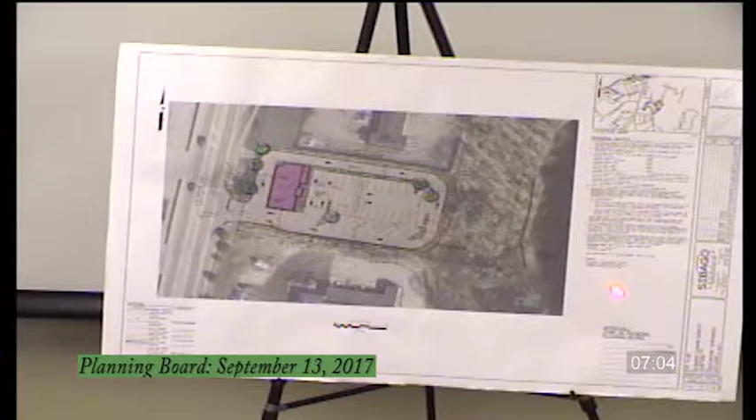The parcel is 0.75 acres in size, so it's a fairly small parcel. We're only developing about half an acre of the parcel. As you've looked through the plans, there's a fairly steep slope off the back that goes down to this kettle hole in the back side of the property, and that slope is one we really want to stay away from for development purposes. So we've worked to keep the development up towards the front of the site.

Dunkin' Donuts currently leases property in the Circle K that's just about 200 yards southerly of this site, and they've been trying to find a location in Raymond that they can own and operate on their own. They have found this parcel of land and have actually closed on it and purchased it. Is that correct, Jim? Yes.

As I indicated at the last meeting, one reason we went through such a thorough presentation was that there was a very short due diligence period, and the owner had to decide whether to purchase the property or search for another site. We felt this seemed to be an appropriate location, and we appreciate all the input the board had for us.

The Dunkin' Donuts site will include about a 2,000 square foot building at the front, parking area internal to the site, and circulation for quite a bit of queuing around the perimeter. This has worked pretty well on the other sites they've done.

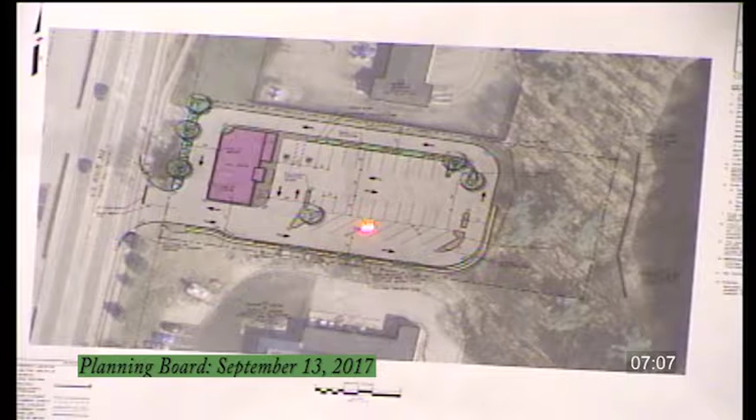The order window or order kiosk is over here, with pickup around this side and exit out through this way. The entrance comes in and separates the parking from the circulation area around. There are some diagonal spaces within the circulation path around the site. Where somebody needs to exit through here, we've provided a break in the curbing so they can get around the site. We envision these will mostly be employee parking, with this being customer parking inside. We've also provided handicap parking within the project site.

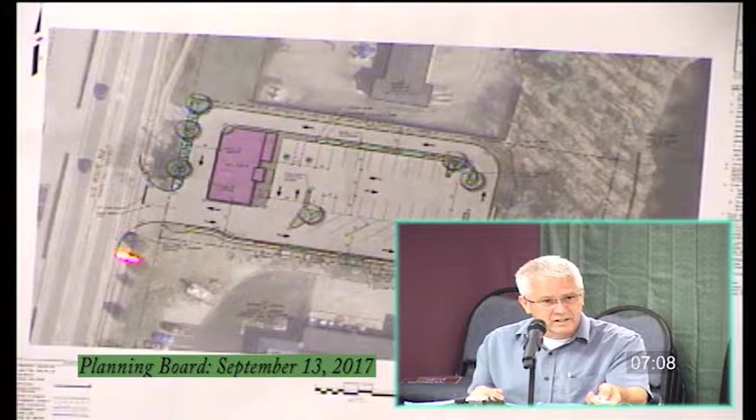For truck circulation, as I mentioned at the last meeting, in your packets there are turning template diagrams showing how trucks would come in and out of the site. We've designed the site to allow trucks to use the parking lot to circulate around—these are rollover curbs in this location and down here. Delivery times can be scheduled by Dunkin' Donuts or the owner to be outside normal business hours, so trucks can come in when there are relatively few people or nobody in the lot, and make that movement around inside the site.

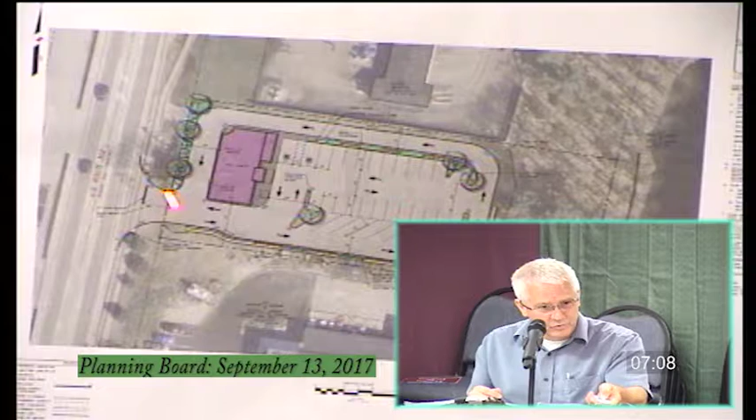There isn't enough room for the truck to make this turning movement all the way around—a tractor trailer just needs more room than we can provide. This design is meant for passenger vehicles moving in and around the site.

The topography on the site slopes towards the back of the parcel, towards the kettle hole or pond in the back. There's a single-family house on the property that will be demolished—I think it sits just about in this area—and we'll develop within this footprint.

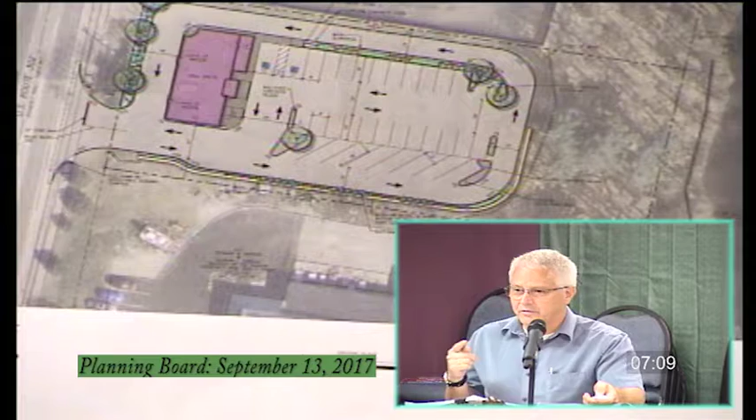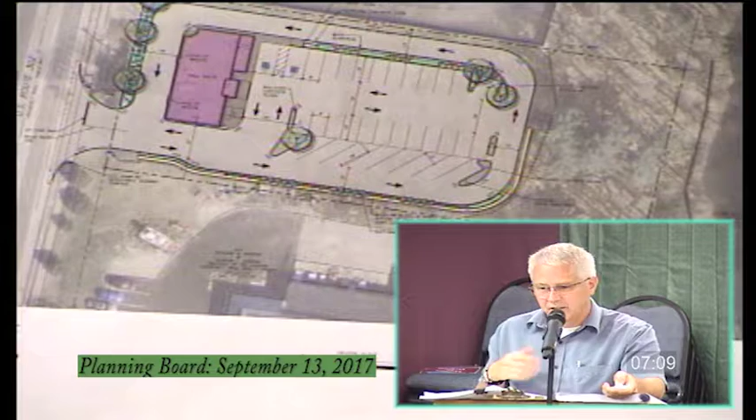The project will include a subsurface wastewater disposal system since there's no sewer in Raymond. That system, detailed in your packet as the HHE 200, is an advanced treatment soil air system. Because of our experience with Dunkin' Donuts, we like to use a higher level of wastewater treatment, since high BODs come out due to the cream and materials that go into the drinks. So we have an advanced treatment system here with a 1,500 gallon per day oil and grease separator out of the site septic tank location.

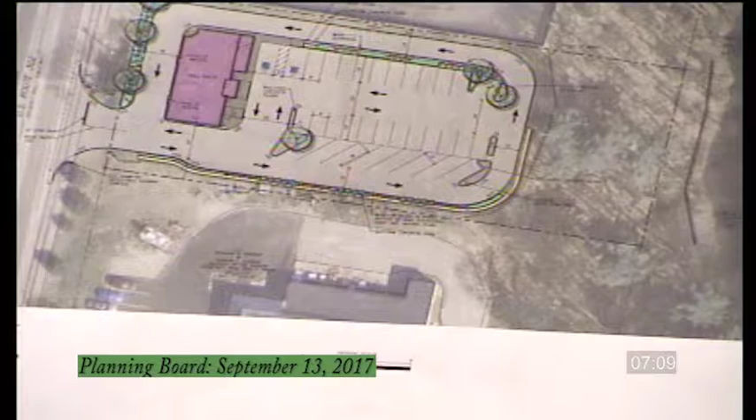Because of the size of the site and the volume, we've applied to the State of Maine for what's called a lot size variance waiver, since you're allowed only a certain amount of flow for a certain lot size unless you request a waiver. We've gone through this process several other times on commercial lots, and as long as we're not asking for any other waivers, it tends to go through pretty straightforward—Will noted that in his review comments.

The other thing is we have an underground stormwater management system on the site. That system will take surface water and run it through an underground chambered system, through a filtration system, and then discharge it to the back of the site.

While we don't have to go to the Department of Environmental Protection for stormwater management on this site, we have designed a system to treat the stormwater generally to those standards. The site's too small. Our development area doesn't trip any of those thresholds that would require us to go to the DEP. Will's review had commented on the discharge rates from the system.

We were focused on treating the stormwater, and since this property abuts this sort of kettle hole in the back of the site, there's really no outlet. It looks to be a glacial feature. We were going to focus more on treating the stormwater to get it back into the pond to allow for recharge of that treated water back into the system.

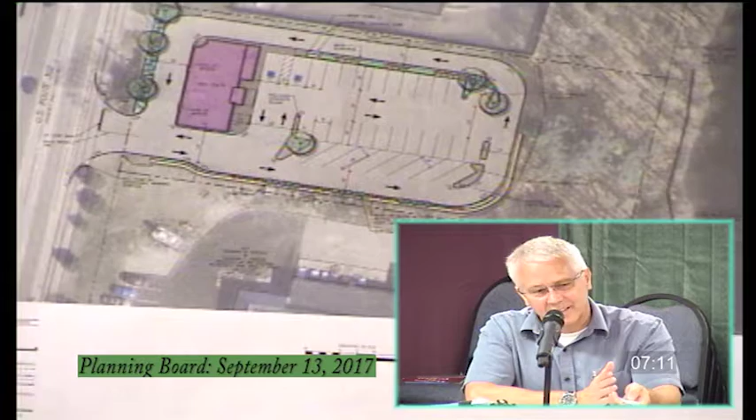We have since looked at our model after talking with Will — and I'm sorry, Will, I caught you out in the parking lot before the meeting — but we have a way to technically increase the stone volume and change the design slightly so that we get a little more detention on site, and so that our pre and post development discharge rates are pretty close to each other. Still, we treat the water to the higher level of standard and discharge it to the back of the site. Will has mentioned that in his memo as one of the conditions, which we will certainly address — I'll provide the paperwork for it. But we did look at that, and I appreciate that conversation we had.

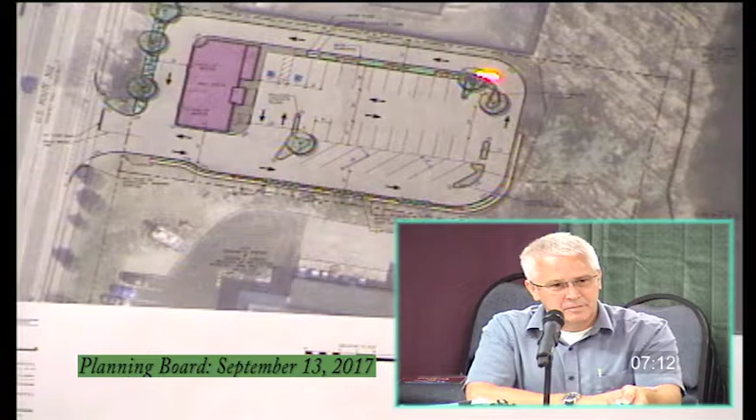In your packets, there's a photometric plan for lighting on the site. We use Swaney lighting, which uses LED cutoff lights focused on the parking area. The photometrics were provided in your packet to show that we'll keep our lighting to our property and won't be dealing with sky glow. Basically, dark sky lighting is the intent here.

I want to take a moment to talk about the building. Well, let me talk about traffic a little bit more too. All Dunkin' Donuts projects require a traffic movement permit, and we have filed for that traffic movement permit.

We had our scoping meeting with the town. Of course, Chris Hansen was there, and Will, I don't think you were able to make that meeting, but we provided a copy of the traffic movement permit in the packet. We have since met with the Department of Transportation and done some traffic counts on the site. At this point, it looks like they should be issuing a permit in the very near future.

One of the things they look at on Dunkin' Donuts sites is that traffic approaches a little over 200 trip ends in the peak hour. A trip end is a car coming in, a car coming out, so it might be like 100 round trips in and out.

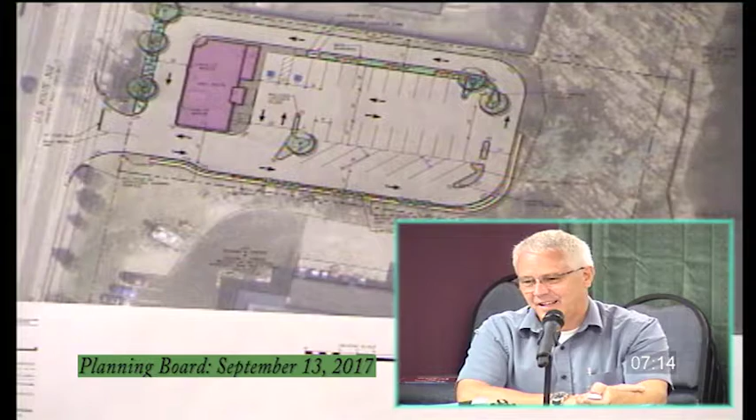They also look at the ability to make a left-hand turn movement from the adjacent road. If you've ever been up at the Naples Dunkin' Donuts site, you'll see a left-hand turn lane was built there coming from Naples heading into town. That was because the warrants were there — meaning the traffic counts, the stacking, the queuing to make that turn justified the left-hand turn lane. In the Naples case, we had to construct the left-hand turn lane because there wasn't anything there at the time.

In this section of Raymond, there's actually a center dedicated turn lane that allows for turning in either direction, so in this case we already have that turn lane built into the site. Sight distance is great at this location — it's a pretty flat, linear portion of the site, so that's not a concern.

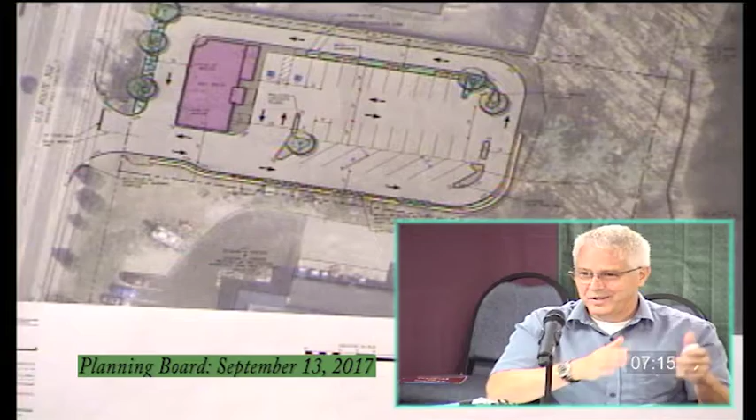Nathan White, Public Works Director, has asked us about curbing — originally we didn't show curbing, but we've since added curbing to the plan coming out to the street. The sidewalk system that's out on the street doesn't have curbing associated with it; you have road, esplanade, and sidewalk on it.

Apparently, at some point — and I don't know whether it's the town or DOT, maybe Will knows — Nathan mentioned that curbing was going to be installed by the town or DOT through here. So he asked that we show the curbing running all the way out so that it would match into the curbing they will be installing, and we've done that on the plan. It'll be important to coordinate the timing of when our curbing goes down and when Nathan does his, because I don't like to put curbing out into the travel lane when there's not another curb to match to.

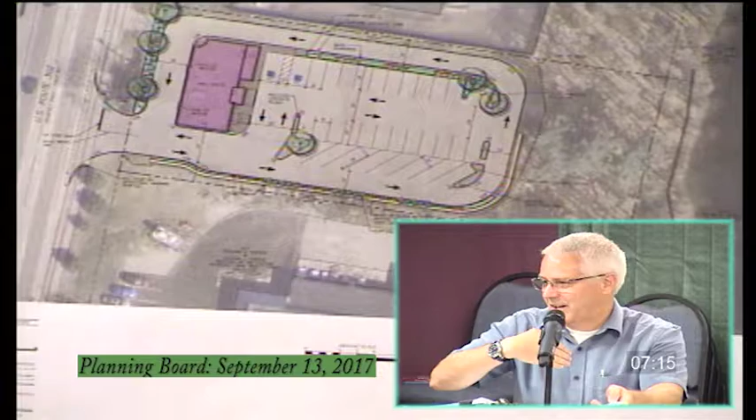Otherwise, it's just a hazard for the plow to clip and rip right up. So we'll have to make sure the timing is coordinated, and we'll work with Nathan around that piece of it.

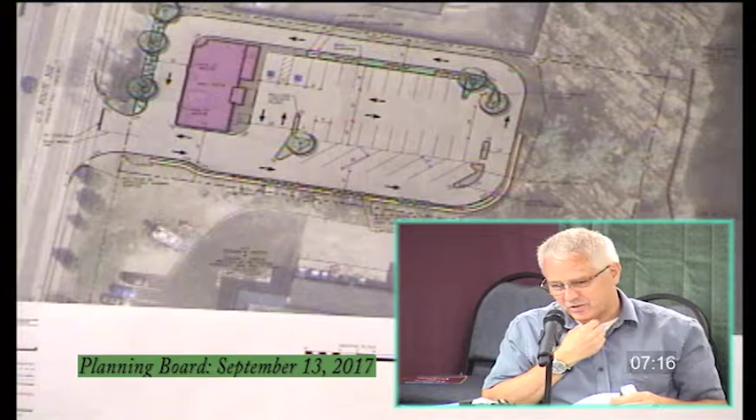The building itself is fairly small, about 2,000 square feet, not much larger than a good-sized ranch home. We've designed the site and the building, and I'm going to turn the plan around.

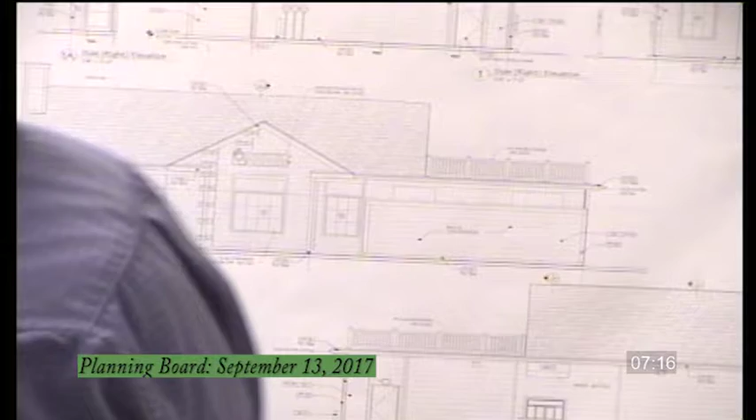So those are the building elevations of what the building will look like, very similar to what we did in Naples. Raymond has architectural guidelines, which actually were helpful to us.

Dunkin' Donuts doesn't like to build buildings like this at the corporate level. They prefer something more like what you see in Windham. But because the town had architectural design standards, we were able to provide that to Dunkin' Donuts, and they agreed, at least that's my understanding, Jim, at this point. It's tough for them to do that, but they agreed because we sent them your entire packet of architectural standards. So the town did a good job putting that together, because we'd much rather build a building like this.

This building will have an asphalt shingled roof with architectural shingles. It will be a pitched roof with dormers, one on the front and one on the side. There'll be a monolith bump-out on the front of the building resembling a chimney. We'll do eave returns and changes in the roof lines so it looks different from various angles, giving it more of a contemporary New England look.

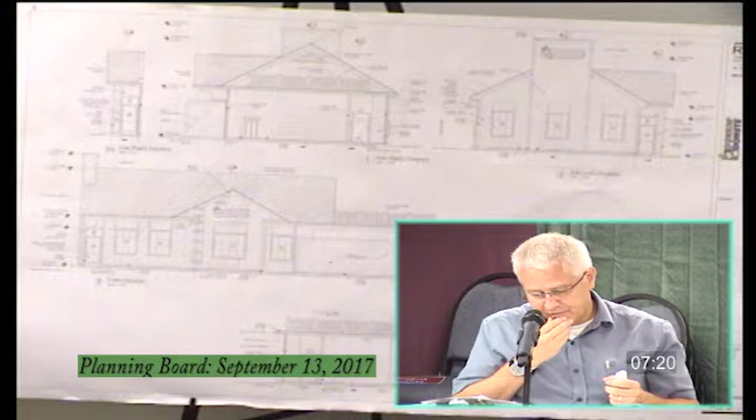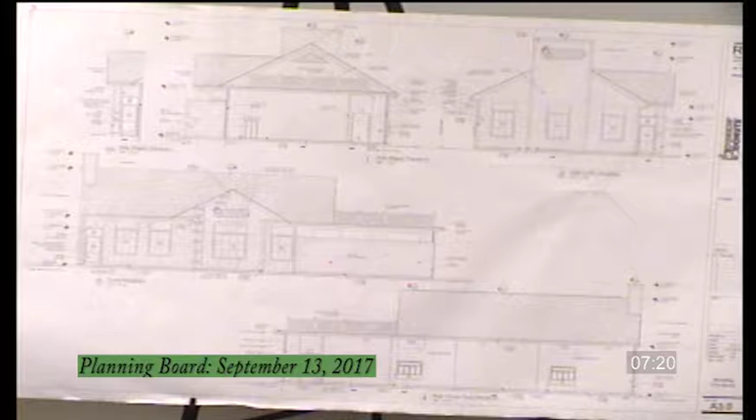At our last meeting, we discussed the need for a waiver on the side yard setback. If you recall, the commercial zone has a 15-foot side yard setback, which can be waived down to 5 feet in a setting where the development on the other side — like pavement or parking close to the property line — already exists. We have that in this case with the car wash to the north, which has circulation right up next to the property line. They're almost paved right up to the property line.

What we're going to do is let me flip the back over.

Up on this side, here's the edge of the parking on the car wash side, and here's the edge of our parking. There's a 5-foot separation through here. On the southerly side will be 10 feet off the property line. Because of the topography drop off to the south and to the back, we'll end up with a modular retaining wall around this piece of the site. That wall will be set back about 7 or 8 feet from the property line, with the pavement 10 feet from the edge of the property line.

The reason we're asking for those waivers, as we talked about at the last meeting, is that when you look at the size and configuration of this parcel, and what we need to accommodate for separation between the drive-through and the parking on site, you start at this side with the drive aisle. We do provide some landscaping here. We have a circulation area, parking, angled parking to try to reduce this side, and a drive-through on this side. When you take the physical measurements across, you end up with 5 feet on this side and 10 feet on this side of the site.

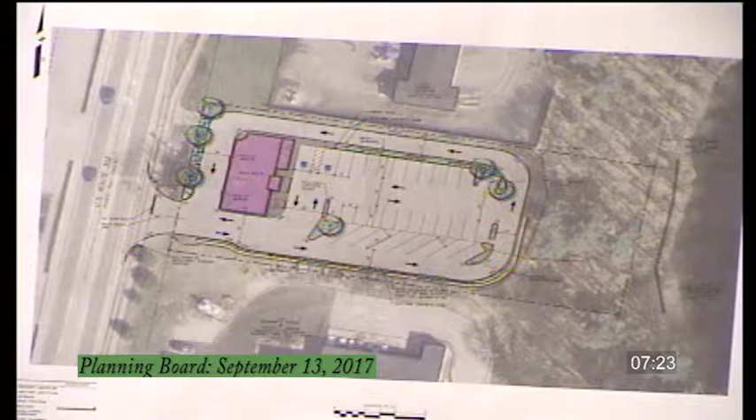We looked at other configurations through the process. We talked about that quite a bit at the last meeting, bringing the drive aisle through the center of the site. But what happens is when you've been to the Windham Dunkin' Donuts in Standish, when the drive aisle goes through the site, people are stacked right up through the center of the parking, and nobody can get into the parking or out of it. So it's best to have those separated. It's a lesson learned from a number of Dunkin' Donuts, and this works best for circulation. It's very similar to the one we did in Naples, and that circulation from all accounts works very well.

We do have a landscape plan developed for the project. It includes landscaping and street trees along the front, a couple of trees on the back side, some landscaping and a small esplanade along the wall on this side, and additional landscaping in this green strip area and what we can fit in along the edge. The owner is very aggressive on his landscaping—he likes a lot of perennials, likes a lot of look to it. Jim can nod and take him on that. More than likely, there'll even be more landscaping than what's shown on this plan. If you've been up to the Naples location, there's a fair amount of landscaping involved, but he's very adamant about that for his landscaping piece.

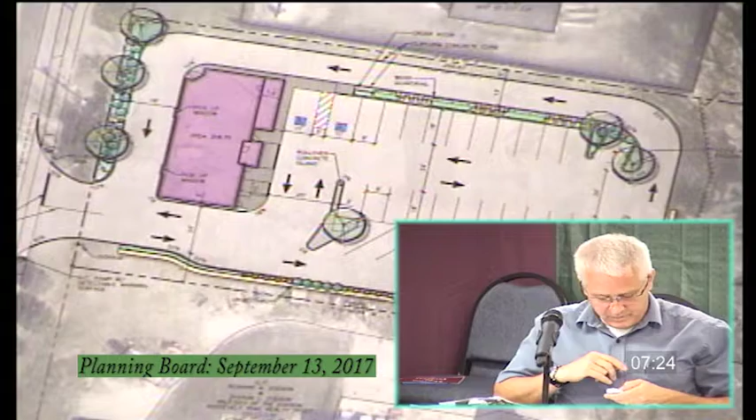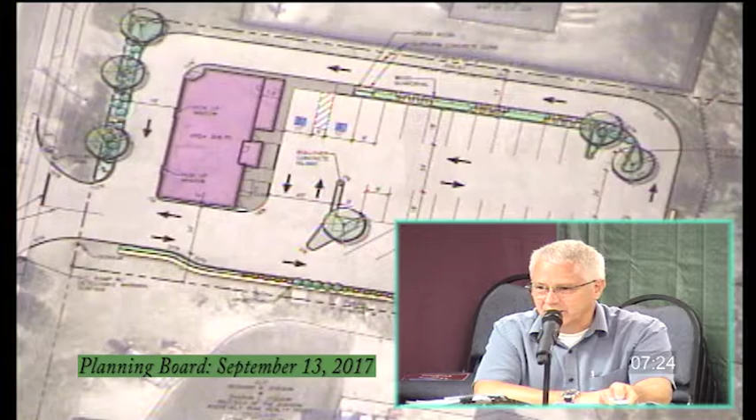There was one other item that somebody on the board brought up last time that was a great idea—a question about if we have all this pedestrian movement along Route 302 and the sidewalk, shouldn't we have some way of getting a sidewalk up to the site? This was my color rendering from the earlier plan, but the plans you have that we're asking for approval through now do have a sidewalk that comes up alongside the building to get to the site. I believe, Will, that was you who mentioned that, right? Okay, so it was a great idea, and the owner was all for it because they want to capture pedestrians too coming to the site. So the plans in front of you have that access to the site.

So with that, we're here tonight. Appreciate you hearing our presentation, and either Jim or I will try to answer questions the board may have. And if we read the planner's review, we are agreeable to the 3 items that were in the review letter. In fact, Will and I talked about them, and so we look forward to having a new Dunkin' Donuts in the community. Thank you.

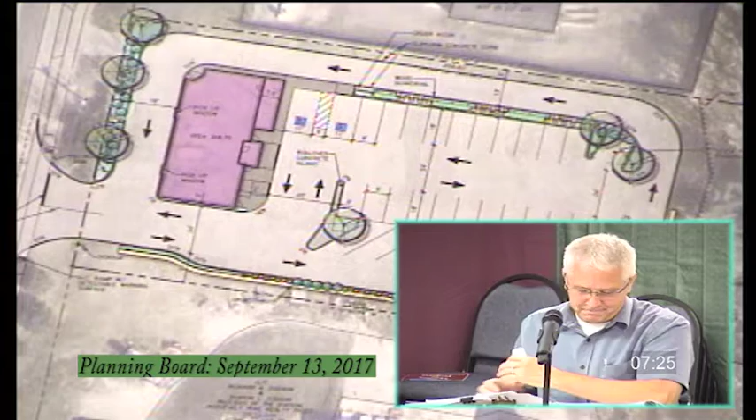We have Will's review first, or should we do that before the public hearing? A little bit. Is that what we normally do? Yeah, okay, all right. Will, you want to go over your comments on the application for the public hearing?

Sure, do I need to push this button, or am I good? I'm good, excellent. Thank you. My name's Will Haskell with Gorrill Palmer Consulting Engineers. I apologize because we received the application material about a week ago, so it took a little while for me to get through it and get the memo back to you folks here at the board.

I also have to apologize in that I didn't have a copy of the design standards for the building, and I wasn't able to download those off the website because the link was broken. So I did not review the design standards relative to the building architecture in this memo. I'm not sure what that may cause, but I wasn't able to get that as part of the planning board memo. But in general, I think the plan is very well done.

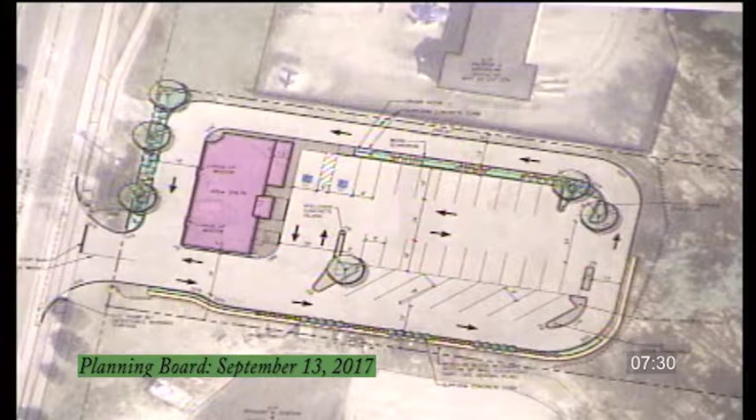The one comment I had was about a certain registration form that DEP likes to see for infiltration systems. That goes away because they're not going to have an infiltration system. And then the other comment I had was relative to separation between septic systems and stormwater infiltration, but if they're going to have a liner in there, there is no issue there.

So again, I haven't seen the revised calculations, but based on what I hear, it sounds like they'll address my concerns relative to the stormwater on this project.

And for utilities, again, they've provided an ability to serve letter from Portland Water District. Owens described their advanced treatment system for the septic disposal. They have the 1,500 gallon grease trap, which is a good thing for a restaurant type facility.

I guess one other comment—as you were describing the retaining wall, Owens, it wasn't clear to me, and I may just be missing it. Is there any kind of guardrail along that curb line with the retaining wall, or is there not a need for a guardrail there? I know you've got a curb all the way along that edge, but then you've got the retaining wall, which isn't too far away from the curb, and it almost looked like it might need a guardrail in there, because it looked like the retaining wall was ranging anywhere from 4 to 6 feet of elevation difference.

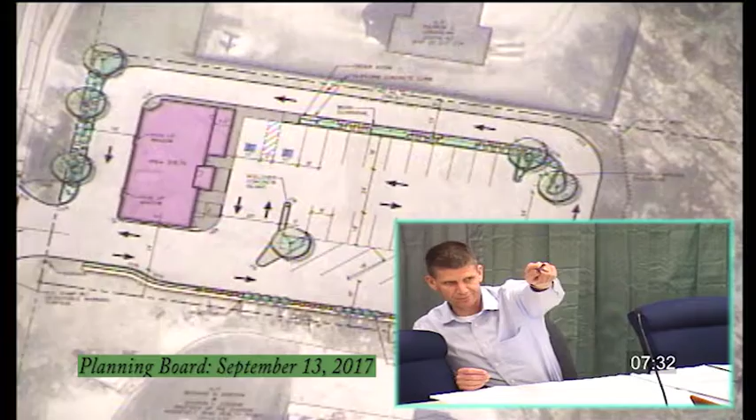You talking around the back lower right corner back there, or? I don't have a pointer, but basically all the way from the entrance around the back corner. Oh, okay.

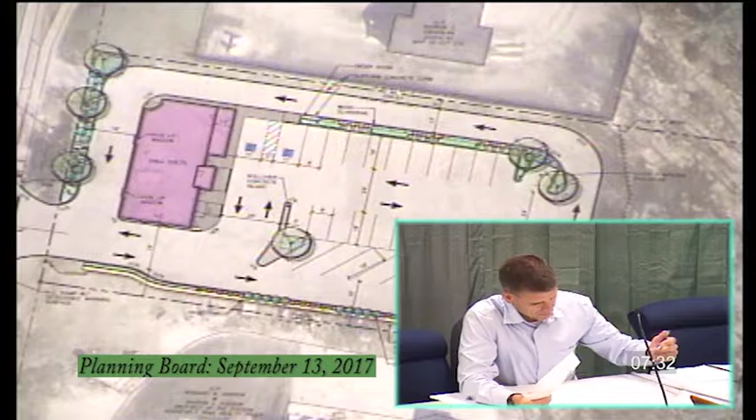I actually had thought about a guardrail through there at one point, because on highway road designs, if you don't have a clear zone, you have to add a guardrail. I was trying to decide if something like this would constitute a road or some sort of standard for that. I was wrestling with that because the vehicles going through there will most likely be stopped.

They're moving, creeping very slow while they're stacked and queued, and I don't have any pedestrian access back there. So I guess I'm not opposed to putting a guardrail up there. I'm a little bit ambivalent to it. I don't mind doing it.

It's just, from my perspective, if I had some documentation from the applicant in terms of why they feel like they don't need a guardrail in that location, maybe a written response or something, I would be fine with that.

I generally agree with you relative to the slow-moving traffic in there. You do have some pitch down in there. I didn't measure what the slope was exactly, but it looks like it's 2 to 3% or so running down that side.

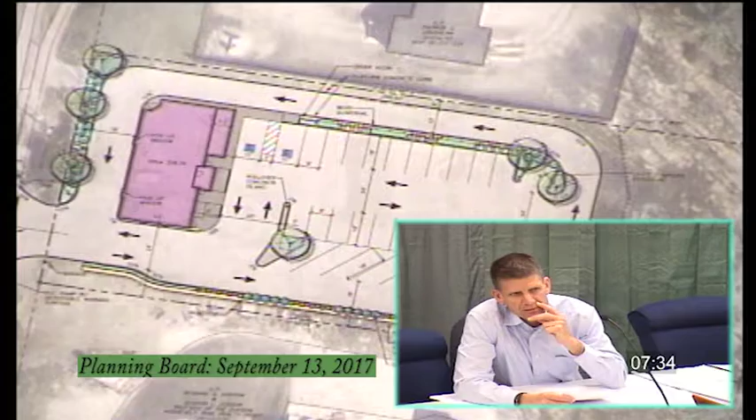It would be sort of thinking in terms of probably where the most risk is, might be down around that corner. So maybe that would be a place to put some guardrail, down around that corner, and then maybe not worry so much about this area here, because there's a storm drain down there and it's all kind of coming down to that corner.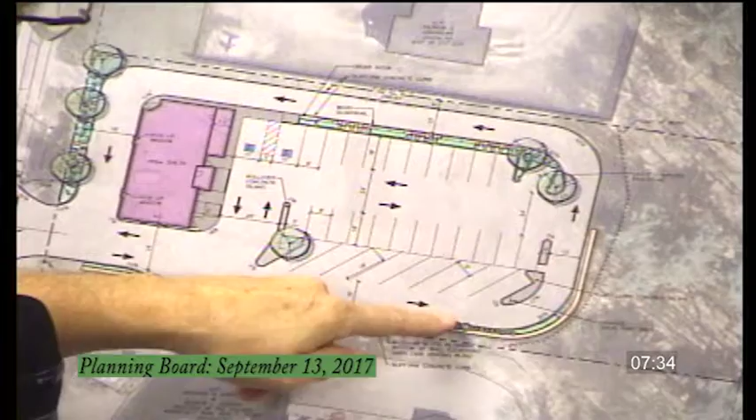I'm not opposed to doing that down in that corner. That might be a good sort of safety approach. Oh, and how much of the retaining wall is exposed face on the high side?

Is it pretty much flush, or is it up 12 inches or 18 inches? These walls, you can build them any way you want. I just don't know how you thought about that design, whether building the wall another course or two high would obviate the need for a guardrail and be a little bit less expensive.

So we have curb on the inside. You know, I don't have that detail with me. I don't know if it shows a reveal, but that is an option. We could maybe do a reveal, and instead, I think if you do a guardrail, it has to be a certain height.

32 inches? I don't know, or 30 — Will, do you remember that number? I mean, the other option might be like a timber type guardrail or something that might look a little better than a galvanized metal rail in there.

Jim just said timber, please. Not that — forest products, good. After everything we've done with trying to make the building look nice, to put those — yeah, no.

What type of a height would you like to see? If they extended the wall up, what would you like to see? Well, the problem with extending the wall up is then it becomes a different type of wall. Because those modular block walls, they do have freestanding versions, but most of them are intended to have soil backing them up, and it's a different, more expensive type of wall if you have a freestanding portion of that.

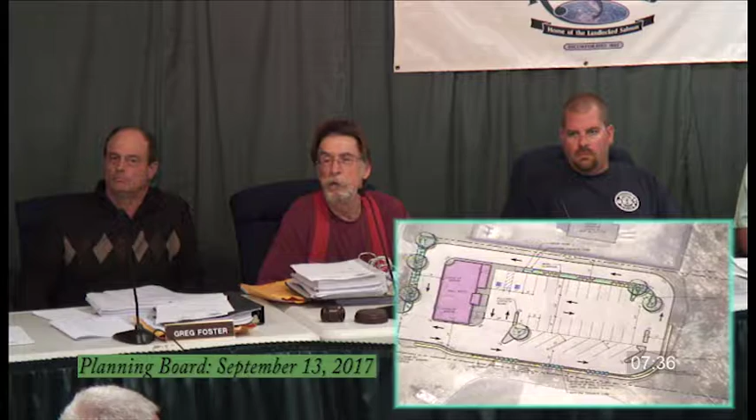So I would almost think the timber guardrail might even be a better option from the developer's cost standpoint than extending that wall up. If folks are agreeable, at this point I would like to propose bringing a timber guardrail around that lower corner, and not trying to do too much with the wall, because I think they have some pretty specific requirements around those modular block walls, how much reveal they can have and things like that.

And what's the retaining on the lower right corner back there, like 4 feet or something?

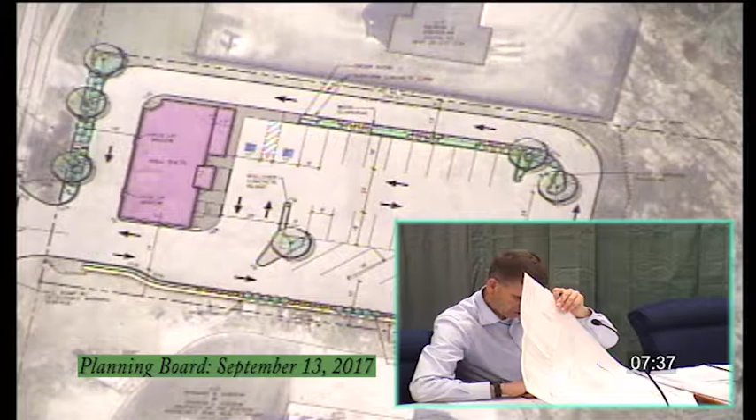On the lowest corner, it's probably more like 6 or 8 feet, Will. Is that what it showed on the plan? 6 feet was actually further up, maybe where it straightens out, maybe it's a lot less down there. Top of wall, bottom of wall, well, it's actually about 7 feet.

From an owner's risk and liability standpoint, I think putting something down around that corner would be a good idea. We'll put something down around that corner.

I haven't done this enough with you folks to know if you want to read down through the memo, or just summarize it like I did. I think anything that's not a conflict or is in conformance with the statutes, we just note it and skip over it. We don't need to read every instance, but things where you have comments, we need to discuss and come to some kind of conclusion.

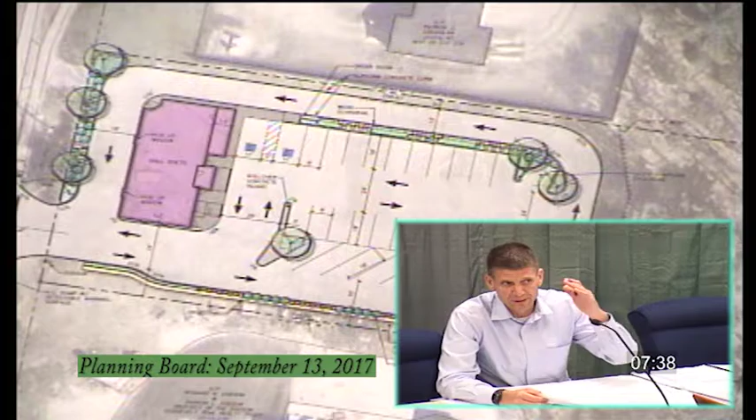I've got the reference to the traffic movement permit under vehicular access, and I talk a little bit about that. So again, I don't have any major issues with the plan other than mostly related to the stormwater that I already talked about.

Going back to the guardrail, what's the maximum retaining on the downslope side that you'd be comfortable with not having a guardrail? Anything higher than a 4-foot or a 3-foot retaining? We need to give some kind of guidance so Owens can know how far he has to take it around the corner there.

Coming down the main access aisle where it's relatively straight, when you've got a 6-inch reveal curb before the guardrail, I'm not overly concerned at that point. But as you start to make that corner at the bottom, I think wrapping the guardrail around there really would make sense from a safety perspective, especially given that the wall is 6 to 7 feet tall in that area.

So to give some direction, from the end of the wall where it ends, kind of wrapping it back up around the corner, up into that straight section a little bit. I don't have an exact measurement, but it looks like it disappears to about 3 feet of retaining, roughly half the way up the east travel, not quite to the corner of the island where you turn into the donut lane. Maybe taking it at least halfway up the east side to where you get to about 3 feet or so of retaining, and then back down around the corner.

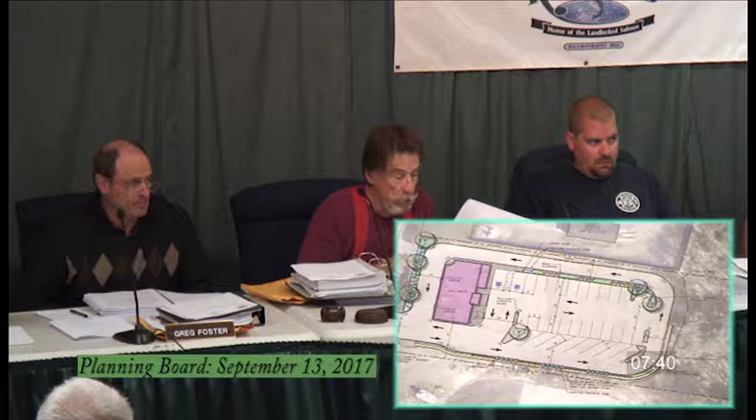I could be on board with that, or even if it was a little bit shorter. As I think about the grading, protecting that corner matters because in winter conditions somebody could slide around that corner or hit the gas instead of the brake and off they go. I hope not, but anything can happen, so I think we should protect that corner.

As far as the architectural standards, that's something I don't think we really get into — that's more of a CEO issue. It's either in conformance or it's not, and he has to work that out with the code enforcement people as part of the permitting process. I don't think we'll get into that.

Who is that now? No, I believe it's optional anyway. Suggested.

Anybody have any questions for Will at this point? We'll come back and revisit that. We need to have the public hearing. Is this not the public hearing? No, we haven't had it yet. Haven't opened it up yet.

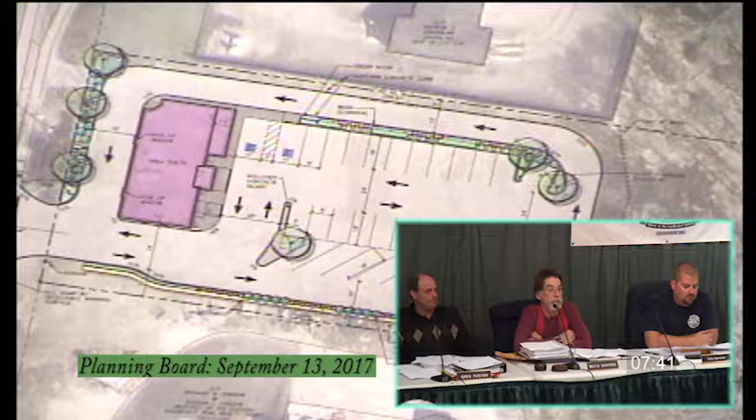There's no detail on the plans for the type of wall. Is there any information on that? It should be on a detail sheet, a typical modular block wall. Is it on there somewhere, Will?

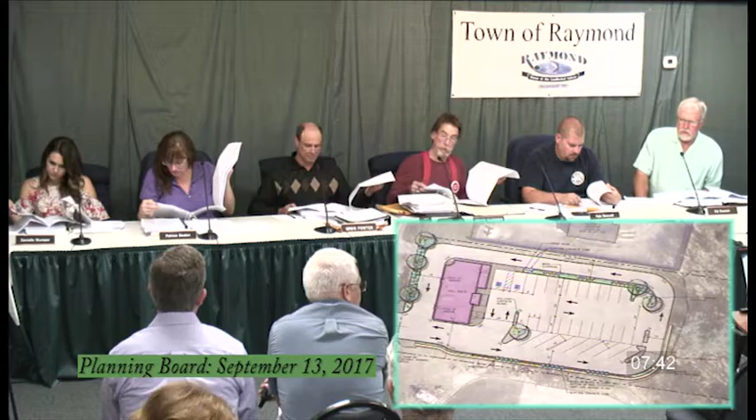I'm not sure I see it on. I don't see one. If it's not, then I don't know why it's not. Usually we put a standard, but different manufacturers have different dimensions, but we have a typical detail that we specify on it. Usually, I think that should be added. Yep, I would. I have to have—a lot of times, what I would recommend on those as well...

And again, you're starting to get into some heights, and I'm not sure what type of wall you're using, but you're starting to get into some heights that are kind of on the verge of maybe needing some geogrid or something in there.

Oh, yeah, those would. So a lot of times what I would recommend to the board is to put a condition that says the wall design needs to be submitted as part of the building permit application, just so you have a detail for that wall design on record.

I don't think the planning board necessarily needs to review it, but it's something that's good to have for the code officer.

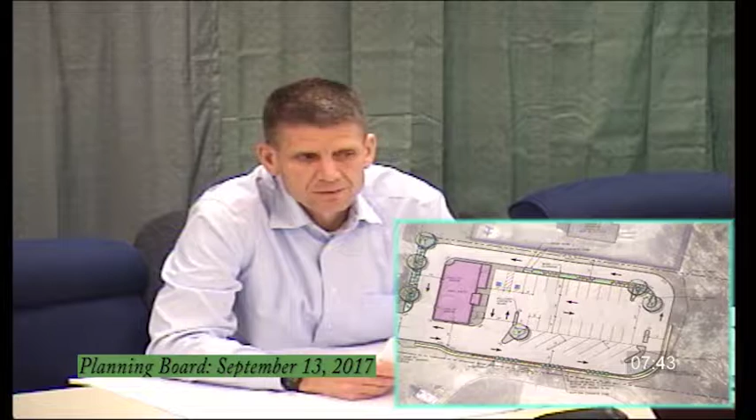I'm okay, because our standard detail says that wall has—because different manufacturers have different setups for the walls—but we require them to provide a plan that's been sealed by a PE, so it's gone through a level of design by the manufacturer. That's on our standard detail, and it should be on the plan. If it's not, I apologize, but I'll add it to the plan. But we require those.

Maybe if you could provide a standard section of the wall. Yep, and just a note underneath the section that it's to be properly designed by a professional engineer. Okay, yeah, that would work.

One thing I noted is that on the trash area, the note on the plan says there are 6 bollards, but there's only 2 drawn on the plan, so I think you probably need to clarify that—either draw in 4 more bollards or change the note to 2 bollards. They're scattered around, and it also calls out to use the bollards as the sign holders.

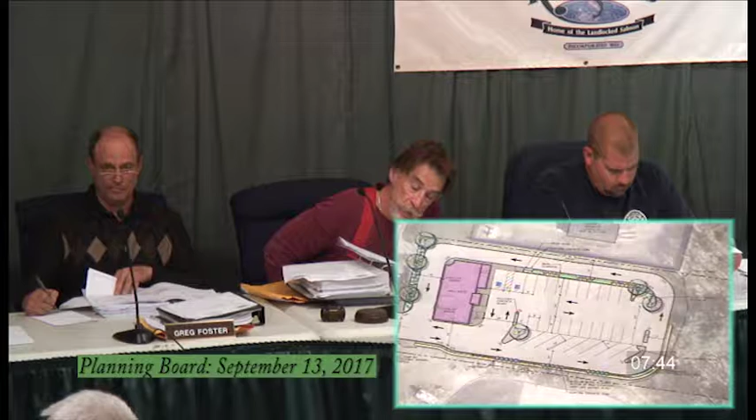I had a question about the size of the bollards—they're only 30 inches tall. Is that what their intent was? That's a pretty standard height for it, because they're intended for bumpers of vehicles coming into it. That's what we've always used on these.

I just noted the discrepancy. You've got 6 noted in the trash area, and then over by the handicap parking, you've got 2 noted. With 2 handicap parking spaces, the note stipulates 2 bollards, so that matches up. But at the trash area, it stipulates 6, and you've got 2 drawn in there.

Should only be—so in the trash area there should only be, I think... actually, I wanted 2 outside, so let me go back here. I have a curb around here, but I wanted to put a couple on the outside of the fence, just for vehicles and plows. There's 2 inside, but I don't know why it said 6. There should be 4 at the most down there.

There's actually 3 shown on my plan—you might want to double check the locations and make sure the quantity and the details match up. There's 2 inside the enclosure and 1 on that corner, right where the curb goes around. There's another symbol there for a bollard.

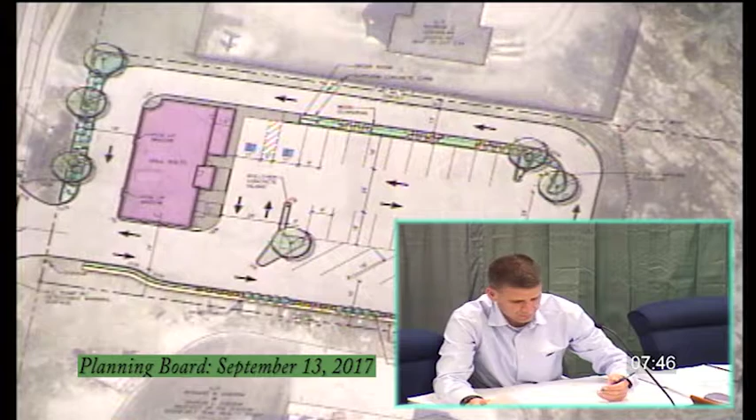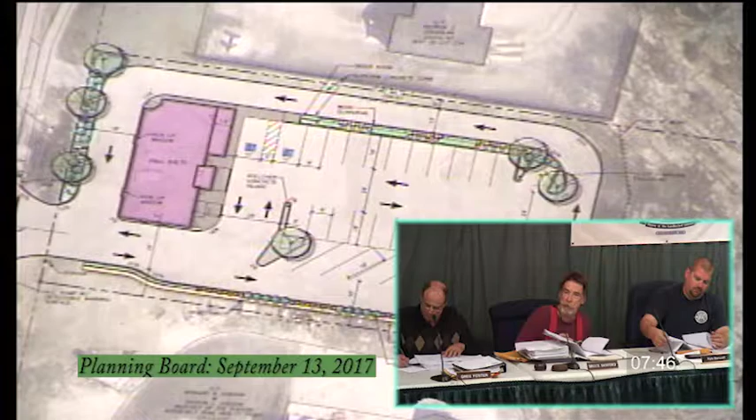Okay, I see the 3rd one there now. The other thing I noted is that a lot of the write-ups indicate a 1,500 gallon grease separation unit, but the detail shows a 2,000 gallon unit on the plan. So you might want to just change the detail to 1,500 gallon instead of 2,000.

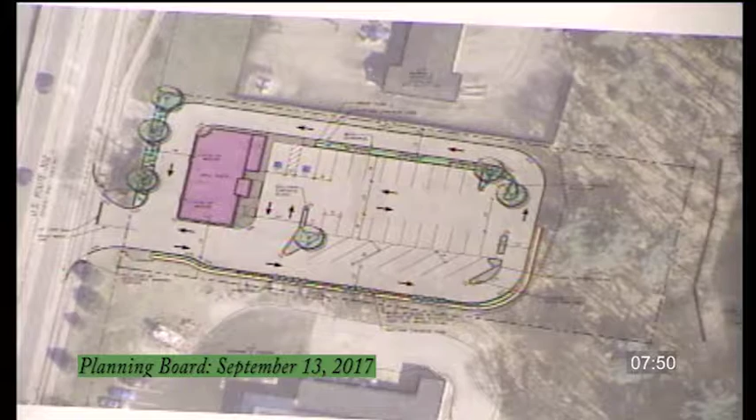What may help in this instance, Jim just reminded me that the speaker in this case will be facing, well, it will help in that it's facing that way, as opposed to the existing one which is 180 degrees away from his house. Right, and the Circle K, I think, was focused at his house, so the direction will probably help. It's probably not in a good spot, where it is at the Circle K is probably pointed right at his house. Yeah, it is pretty much. Sorry about that.

But like I said, you know, when that place was built, we weren't supposed to be able to hear that speaker. And we hear it all the time. It's just been one complaint after another. When I found out about this, I wanted to make sure it wasn't gonna happen again with this building. I don't have a problem with the building. I was just worried about stormwater getting down into that pond and the speaker.

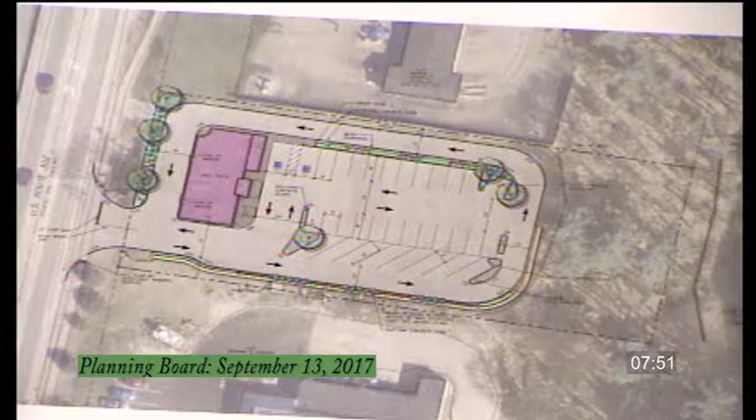Is there any landscaping other than just loam and seed in that long strip of island where the speaker location is going to go in the main parking lot? It's mostly shrubs and low plantings down through there. It's a fairly narrow strip, so it'd be difficult to do much more. There is a guardrail down through there, just to separate the two pieces, but we may have removed that guardrail. There is planting down through there, just so we could have more planting.

Is it possible to consider some of the low plantings right behind the speaker box to come up a little bit higher and provide a leafy shrub shield to noise transmission backwards? Yeah, you could put in a 24-inch arborvitae instead of an 18-inch arborvitae, something like that. Those sort of things would help, sure. We want to be good neighbors, so. Okay, all right.

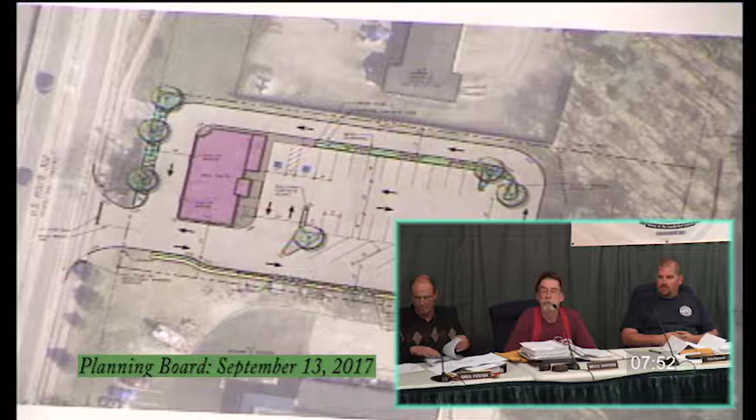Those are the only concerns I had. Thank you. Anyone else in the audience wish to speak? Hearing no more comments, we'll close the public hearing.

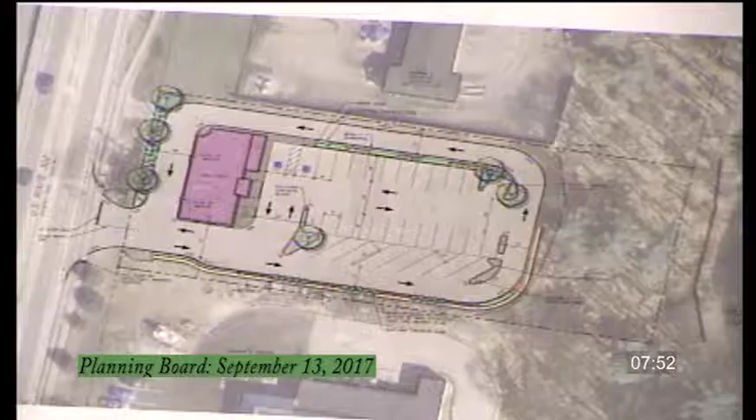Return back to board deliberations. I guess at this point we will walk through generally the things in the site plan review standards. Apparently item 1, preservation of landscaping. 2, relation of proposed buildings to the environment. 4, parking and circulation. Item 6, utilities. 7, special features. 8, exterior lighting. 9, emergency vehicle access. 10, landscaping. Those all appear to have no comments from the town planner that merit any consideration.

We're only looking at discussing further items: 3, vehicular access that needs an MDOT traffic movement permit, and Will's concerns about surface water drainage in item 5, and also inclusion of an inspection and maintenance and housekeeping plan in the stormwater narrative. That's included already. Okay. So really, items 3 and 5 are the only things that we need to specifically break out.

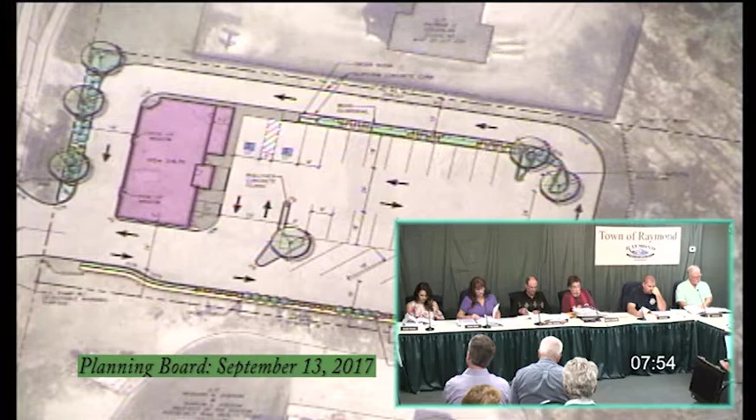So unless somebody on the board has an objection to just stating that there are no conformance issues with items 1, 2, 4, 6, 7, 8, 9, and 10, we will just pass over those items as being acceptable and revert back to discussing items 3 and 5.

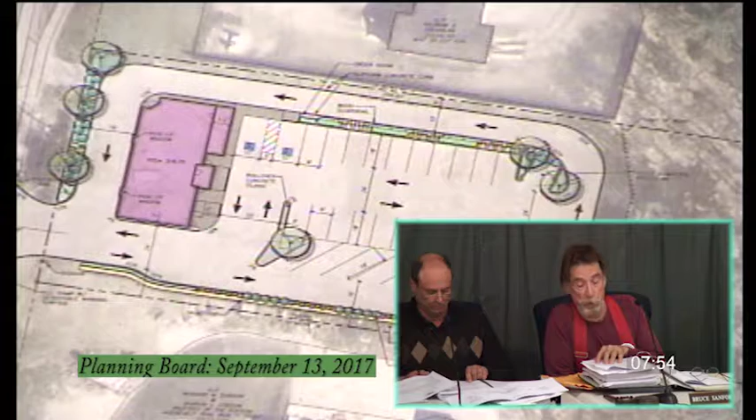Item 3, the project does require a Maine MDOT traffic movement permit, which Owen has indicated. They've had the meeting with the state and they're awaiting the final ruling on that. Is that correct, Owen? That's correct. So I think as long as that traffic movement permit meets the engineering standards and is acceptable to the town planner and the code enforcement officer, does anybody on the board have any concerns or questions about that item?

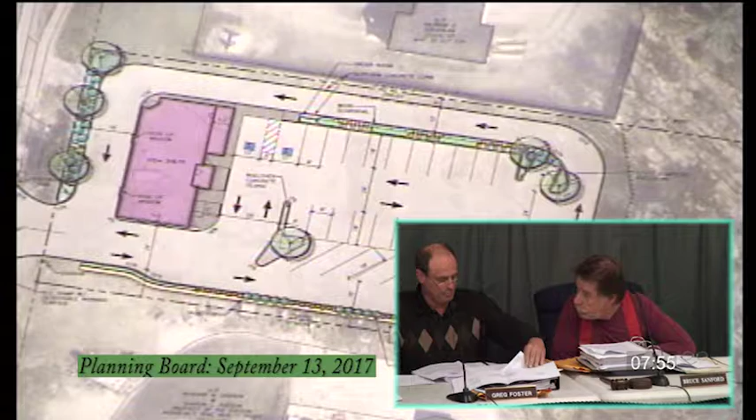Before we move on, I think we need to call for a vote on whether the application is complete or not. Sorry. Okay, that's all right. I'm still awfully new at this, so.

I move that we deem the application by the applicant complete. Do you have a second on that? Second. Okay, any discussion? All in favor? Opposed? Okay, that motion carries.

Okay, now we can go back to the board discussion. We have to make a motion with regards to this, moving on to items 3 and 5. Make a motion. Do you want to make a motion that we accept everything except 3 and 5? Think.

Okay, item 3, we know with the Maine MDOT, and then item 5, the stormwater, there were issues that Will raised that Owen said he'll address. So do I hear a motion for acceptance of the application with the conditions of the Maine MDOT movement permit being submitted, and that the surface water drainage issues be addressed per the requirements of the town planner? So moved. Second. Okay, it's been moved and seconded that the application is acceptable pending resolution on items 3 and 5 with the town planner. Any discussion? All in favor? Opposed? That motion carries.

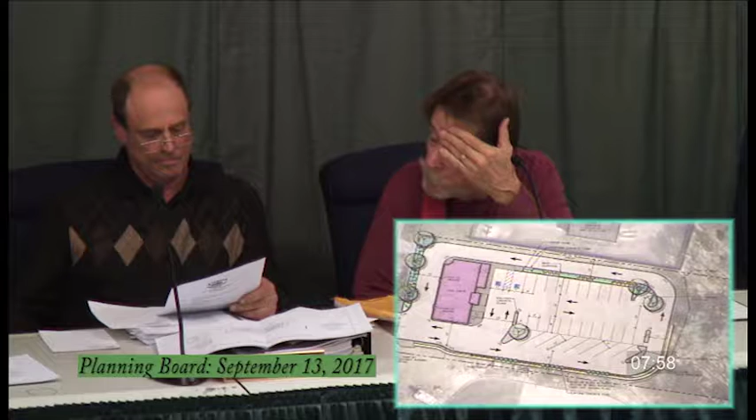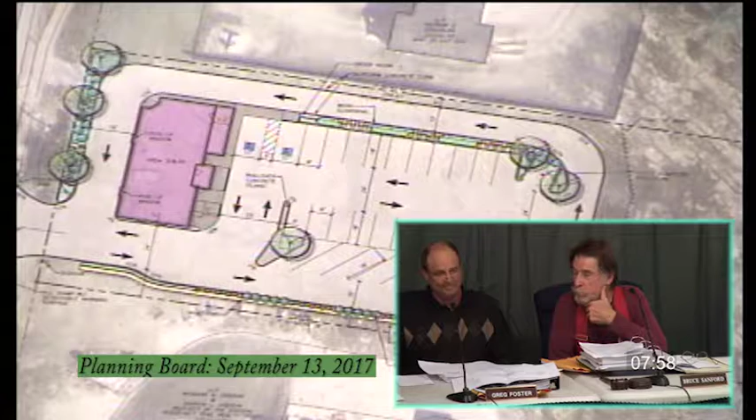Questions from the board? Any discussion on that? Move we accept the waiver request for the setbacks for this project. It's only, what is it, north and south side? North and south, yeah, north and south side of the property. Fine. Okay, north and south side of the property, we've got pavement setback.

We're having fun. That's okay.

You have a second? Second. All right, any discussion on the board on that? All in favor of the waiver? Opposed? No? The waiver's passed.

Then we have the conditions, correct? The condition of the wall design — the guardrail — I move that we... yes, well, I don't have these in any particular order.

I move we accept the applicant's application with the condition that the wall be designed and submitted, with the design included in the submission, using a proper engineer.

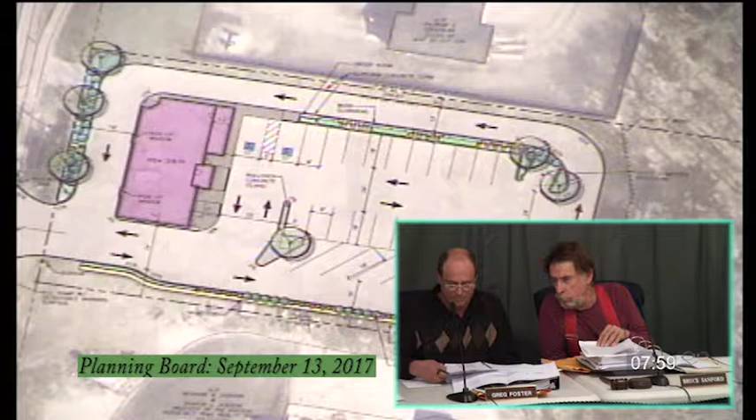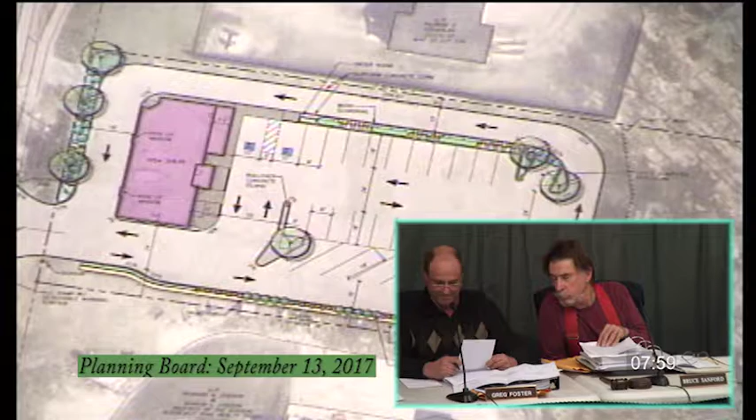He's got to change the septic detail to 1,500 gallons from 2,000 gallons on the plan. Throw them all in there - also include changing the septic capacity from 2,000 to 1,500 gallons per day. Oh, that was the size of the grease trap. Okay, on the plan.

On the plan. What else have we got? We have the guardrail - the wooden guardrail. And that guardrail should be included at which corner? It would be the southeastern corner.

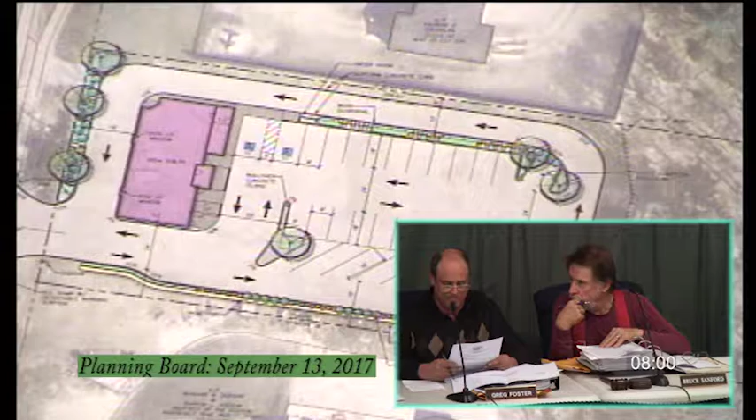Clarifying the bollard count - bollards, right? So is it southeastern? Yes, southeast. Southeastern corner. And that we clarify the number of bollards.

The plan should say there are 6, and they need to all be shown on the plan. Is that right? Well, there's 3 on the plan, right? I guess I don't know why - I thought about why do I need one on the back side of that fence. I just really need the 3 - the one in the corner and the two others - so I should need to change the note to say 3, not 6.

I'll amend my motion from that - it should say 3 bollards, not 6, on the plan.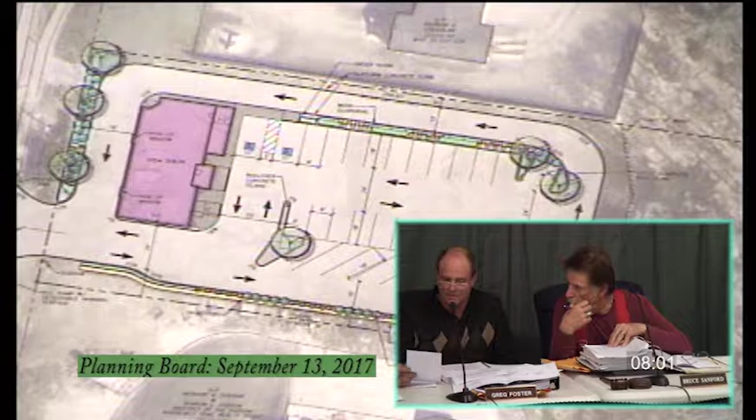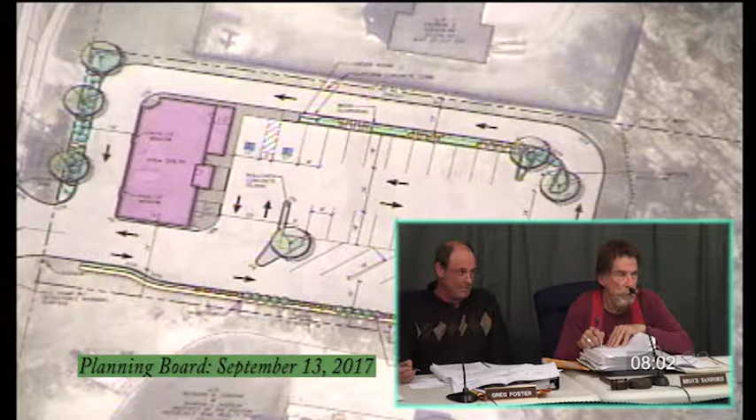And how about the infiltration issue where we're using the liner? Is there any need to address that? My suggestion was just to respond to the stormwater comments as requested by the town planner, but you can be more specific if you want. But your comments don't include anything about language about a liner right now, right? You can add it - I have to, otherwise I'm in violation of the Maine State code. They won't get a septic permit if they don't.

Okay, I have good motivation to put a liner in. So you can add that if you wanted - I've got to do it. We'll include it as a condition, showing it in the detail, with the liner, because it sounds like it's part of code enforcement's plans - part of your design criteria. And it's really subject to review by me and code enforcement.

No, forget it - they show that liner in the detail anyways, so it doesn't need to be included in that - it shouldn't need to be in there.

Landscaping around the speaker - right, to address the concerns with the shrubs at the speaker, for your noise, and also landscaping - include a condition that landscaping be included around the speaker.

Okay, we have a motion to approve the application with the conditions that the cross-section of the wall detail, the retaining wall detail, be provided with a note that it shall be designed by a professional engineer, and that the 1,500 gallon septic will be noted properly on the detail on the plan instead of the 2,000 gallon currently shown.

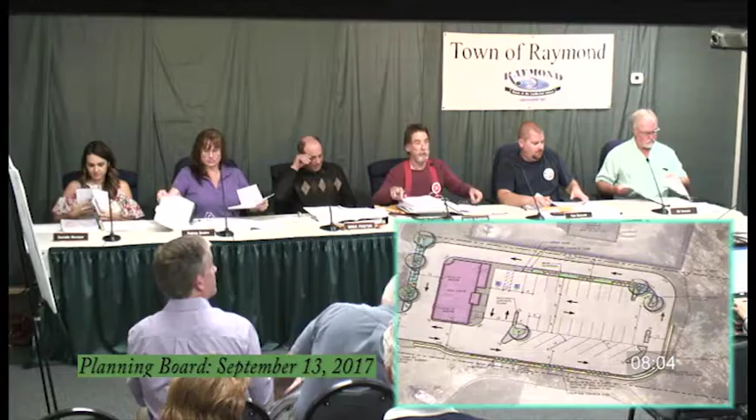So I'm just going to pass these along. They currently have an option to purchase this particular unit. The concern is that, while we have these design guides, these go against the grain of basically everything that we ask for in the design guidelines, meeting New England architecture with pitched roofs and things like that.

However, in meeting with them, there are some elements we can add to make these more compliant, more likely to match the timber framing we have on the shopping center now. What they want to do is basically set that on the footprint where the Mexicana is now, with the long side perpendicular to 302, so that you'd be looking at the short side of that diner.